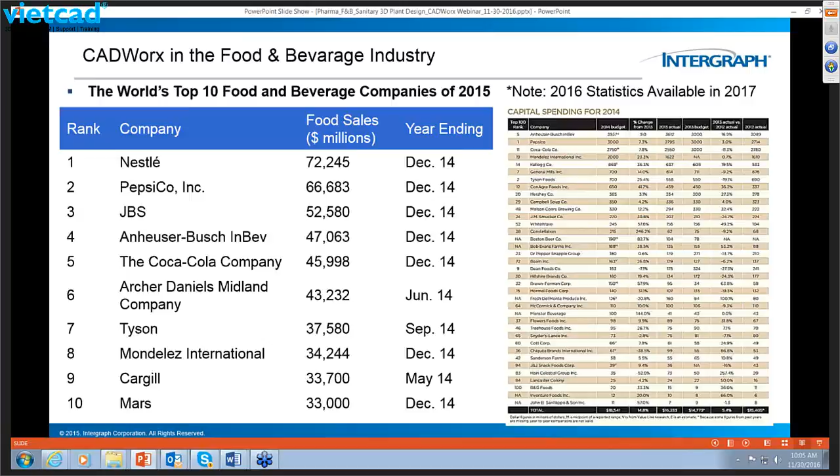And then the chart on the right is really reflecting capital spending. So they are making large revenues and investing in themselves as well, but any of the companies that service them are looking for performance advantages, and that's really the message today, is that CADWorx is a performance advantage for any of the consumers of our software and using it in these industries to perform plant design.

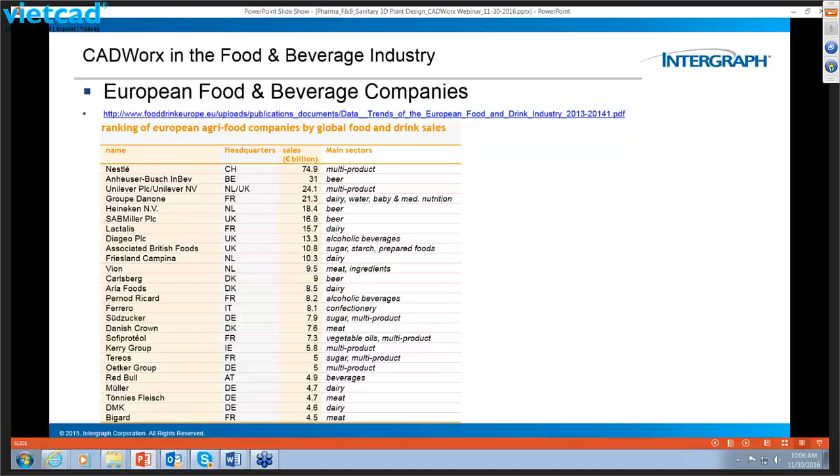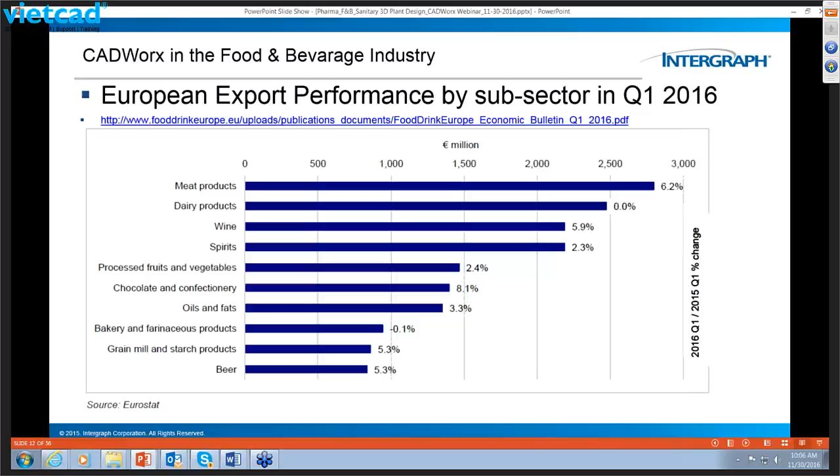Now, with that said, at Intergraph, we understand that our CADWorx plant professional software must meet the demands of our customers in the food and beverage industry. Some of those customers, as an example, is Nestle, Miller Brewing, Kraft Foods, to name just a few.

And when we talk about this, we really are talking about a plant inside of a building, as we show here, the Nestle plant in Bakersfield, California. The challenge is that we have a plant design, but it must be held within a building which is intended to maintain a clean environment.

With that said, that same plant, the Dreyer's Grand ice cream plant, is the world's largest ice cream plant. And in that regard, for the dairy industry, it's quite a success story. One of our clients, the Dennis Group, has been involved with this client for some time. We thank the Dennis Group for their success and performance with our software since the early days of adopting the sanitary specification.

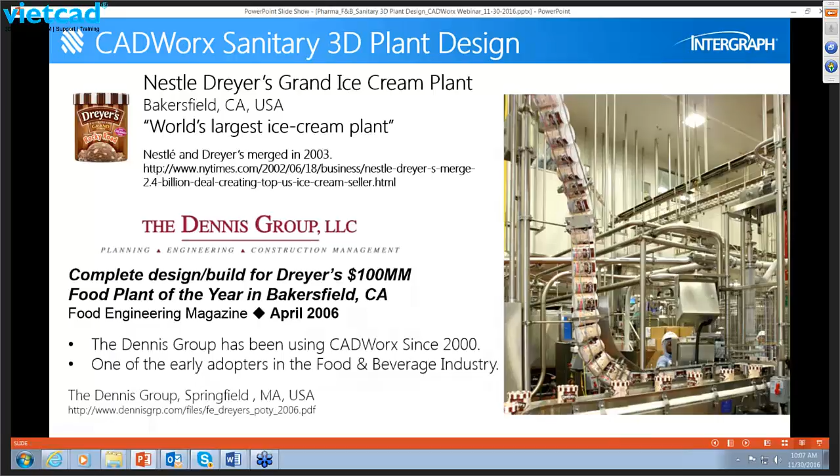Another success is with Briggs of Burton in Staffordshire, UK, where they utilize CADWorx for the food and beverage, pharmaceutical, and health and beauty market. As you can see by this quote, they leverage the database, which results in cost savings from fixed prices with their suppliers because they were able to maximize discounts by ordering in bulk based upon the model. So some really good performance there.

Here's another example in the wine industry in California where CADWorx is utilized to develop their 3D models for wineries, and that application of sanitary piping as well.

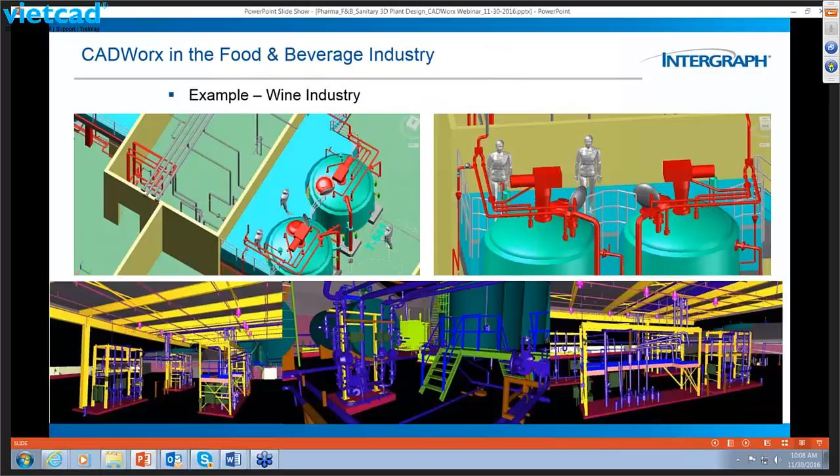Moving on to the pharmaceutical industry as an example, the global pharmaceutical market is worth some $300 billion a year, a figure expected to rise to $400 billion within 3 years. And the 10 largest drug companies control over 1/3 of that market, several with sales over $10 billion a year and profits in the 30% range.

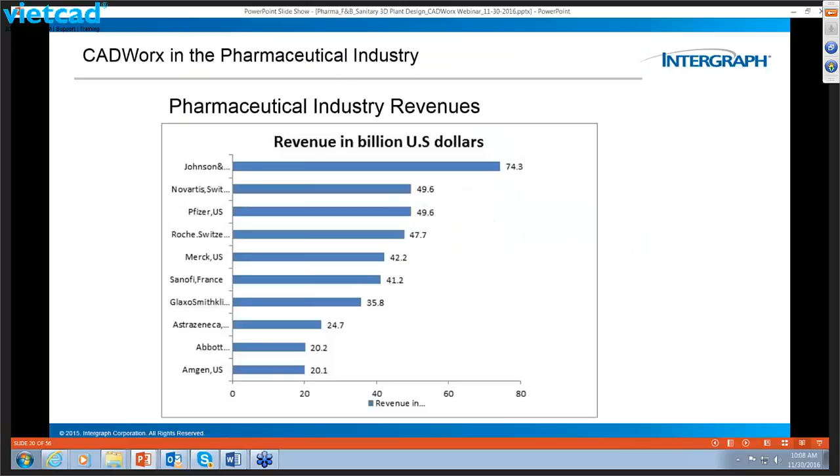But if we look at revenues, in this graphic, we see that it's a very lucrative industry, obviously. Some additional statistics: an estimated 3 billion euros in capital expenditures currently going into the ground in construction. We have companies currently upgrading and expanding their facilities, such as Pfizer or Bristol Myers Squibb. Projected range for these projects are anywhere from 75 to 700 million euros, and will take between 3 to 5 years.

So it's a very lucrative, active industry, and I think we all would agree that we have to eat, we need medicine, we have to drink water. So these alternative industries are growing and will continue to grow over time. They're very prominent and lucrative industries to be involved with.

Some additional statistics, and I bring your attention to the top line, revenue worldwide pharmaceutical market, but then the bottom line projects that spending on medicines by the year 2020 will increase by some 50%. So those statistics mean that there will always be work in these industries.

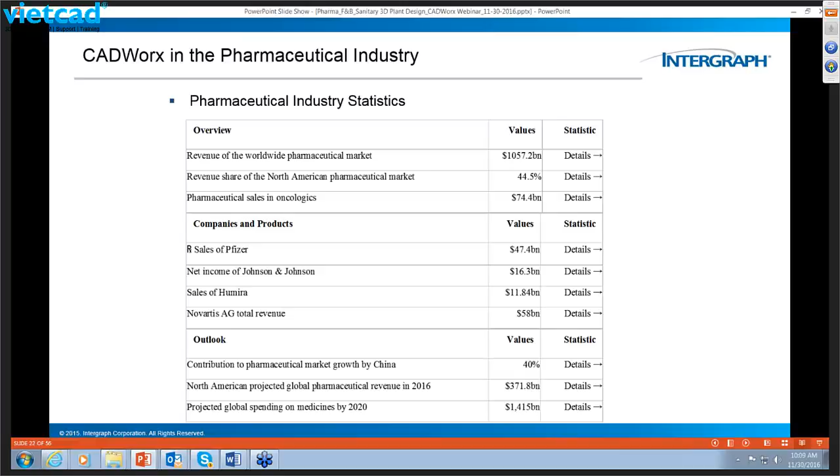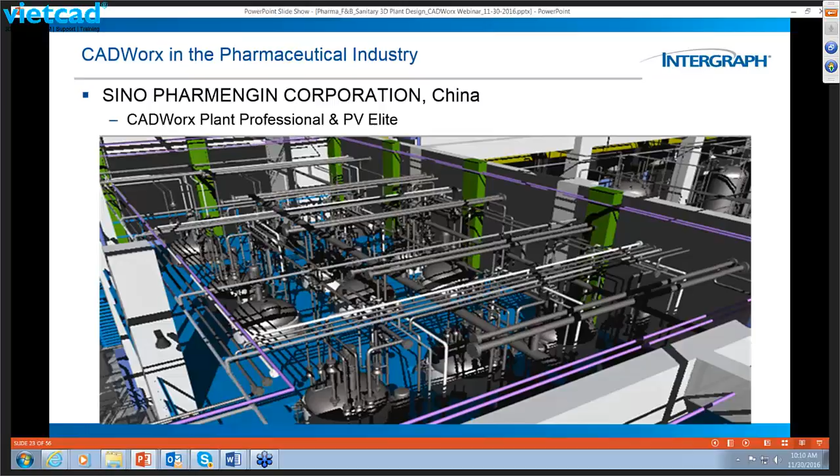Here's an example of CADWorx at work in a pharmaceutical project in China. As you can see, CADWorx was used for the piping vessels. PV Elite was also involved there as well, and we see some examples of that. So there are some examples of some really great projects. But here again, notice that everything is contained within some kind of building structure.

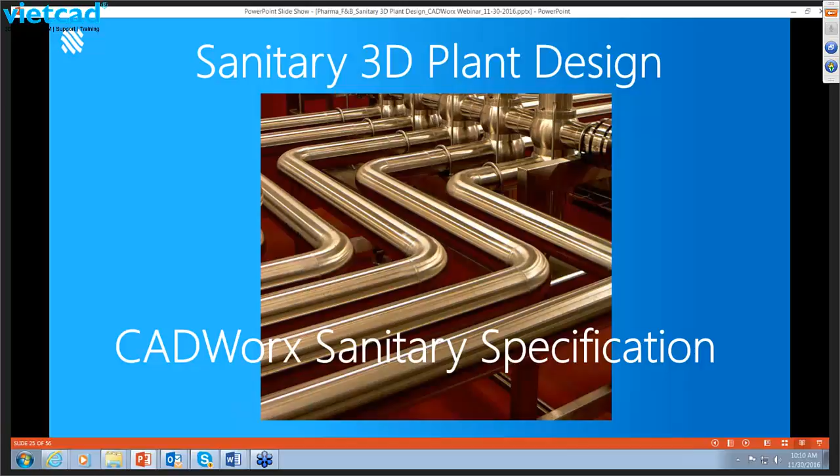Moving on to actually talk about the sanitary plant specification. As we all know, it involves stainless steel tubing and some very unique multi-port valves, as we see here in this image. We understand that the pharmaceutical and food and beverage industries have unique stainless steel piping systems, valves, and vessel requirements, and we deliver software tools to address your industry needs. As we see here, a very unique valve matrix, lots of clamped fittings, and unique vessel representations.

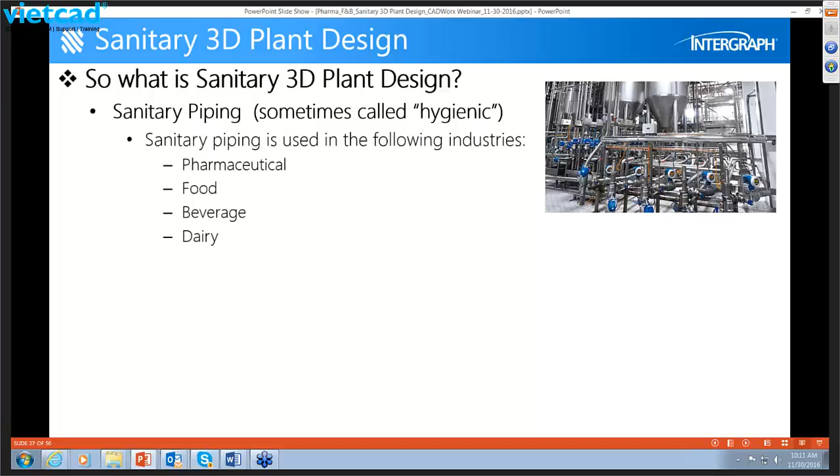As we know, sanitary piping is really utilized in the pharmaceutical, food, beverage, and dairy industries. And as you can see there on the right, a very unique stainless steel environment, very clean environment. Why is that? Well, we have clamped connections which are designed to allow piping systems to be installed easily and then disconnected quickly to modify piping systems between production runs. As you see there, we have the ferrule, the clamp, the gasket, and the other ferrule. These ferrule connections and clamp connections are unique to this industry, and so our specification has to support that requirement.

Obviously, there's another requirement for slope piping to eliminate bacteria entrapment areas. So all systems have to drain. And then we need to support these unique multi-port valves, as you see there in the lower right.

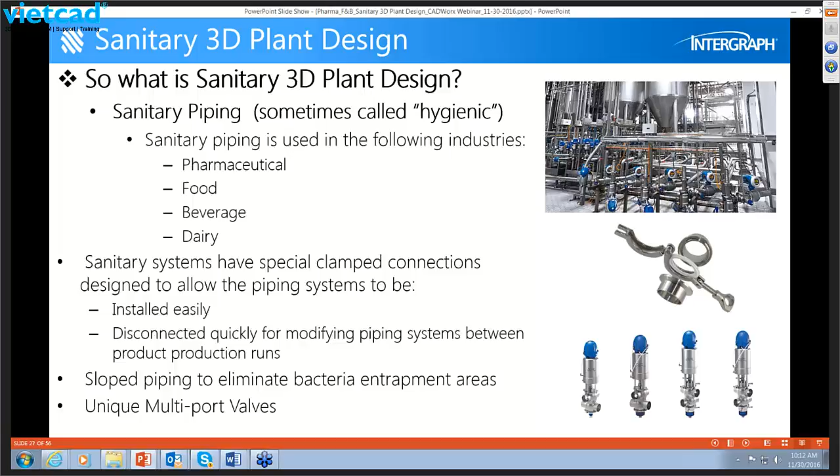Going down the checklist, all process piping and clean in place, or CIP, piping in plants consist of sanitary stainless steel fittings, valves, and pumps, as you see there on the right. Sanitary fittings are polished stainless steel tubing fittings that have to meet certain industry regulations, such as in the case of the U.S., the USDA and FDA regulations that must be met. Obviously, there can be no cracks or crevices or surfaces, including the gaskets, that could hold bacteria. We're supporting the 304 and 316L stainless steel, which is required for cleanliness or hygienic reasons. And we support the butt weld and clamp type fittings as well.

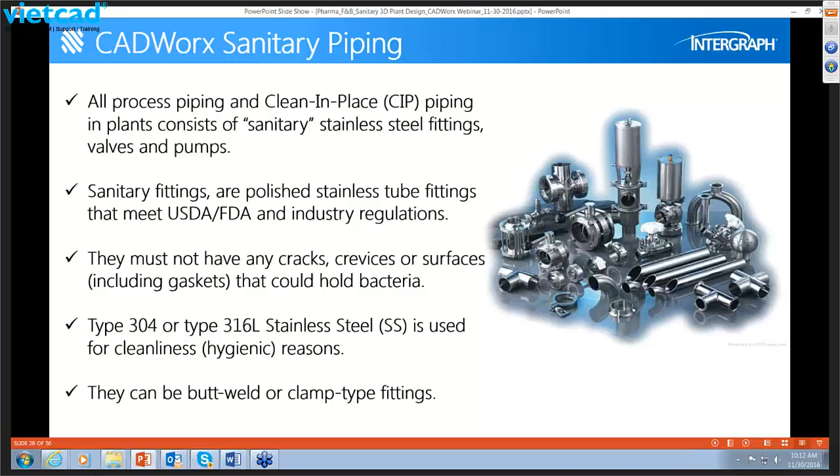A little history. In this case, Jim Lin was one of the original authors that worked with us to develop a sanitary spec, so I pay some credit to Jim for helping us. And that history involved Jim looking for something in the sanitary industry back in the late 1990s.

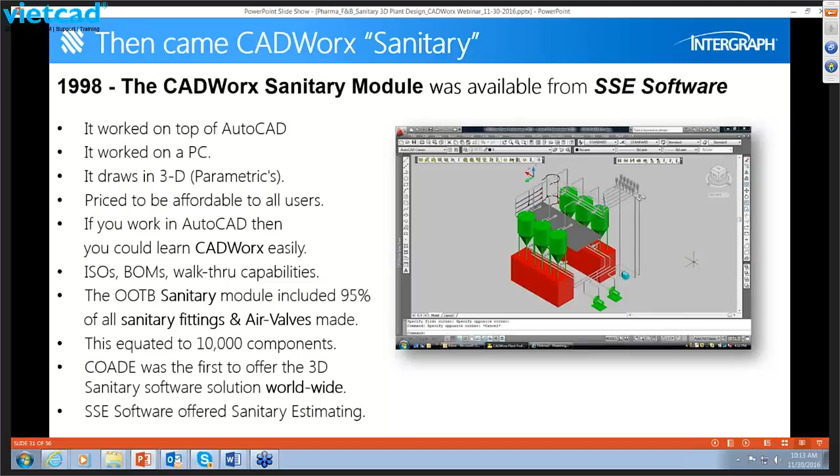Vernon Walker, who knew him, played a key role in having Jim team up with what we were then called COADE to help develop the sanitary spec. By 1998, that spec had been developed and was working in an AutoCAD environment, supporting the migration from 2D drafting, 2D design, to 3D modeling. So in this case, Intergraph, CADWorx and Analysis Solutions had led the way some 18 years ago to move forward with the sanitary specification in support of the pharmaceutical and food and beverage industry.

With that said, I teamed up with Jim again in 2014 to move that legacy sanitary spec forward, update it, and make it work within our current software capabilities. And that's really what we're here to talk about today. That was published as a content pack for our existing customers and for those of you who may be looking at CADWorx and considering it for your applications of sanitary plant design. We had a content pack published in February of this year.

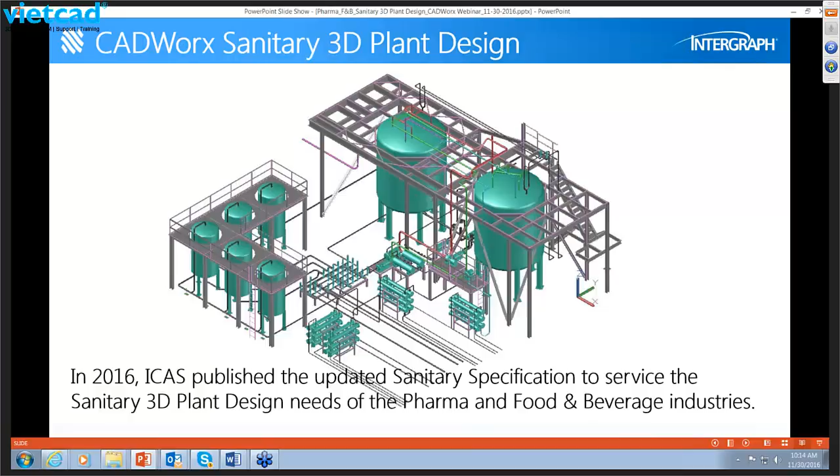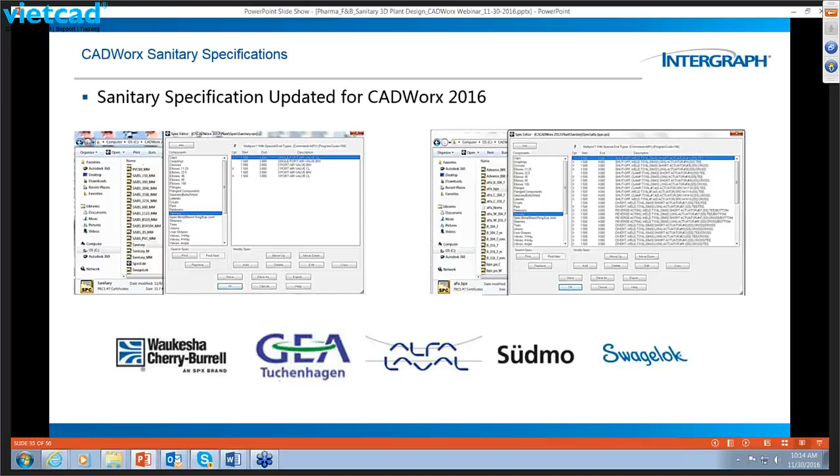That sanitary spec involved migrating a lot of historic data forward into our current software and evaluating various manufacturers of multi-port valves such as Waukesha, Tuchenhagen, Alfa Laval, Südmo, Swagelok, and currently I am in discussions with ITT. That specification, when we look at it in the spec editor, contains the necessary long description information to provide you accurate deliverables and bill of materials for purchase purposes or constructability.

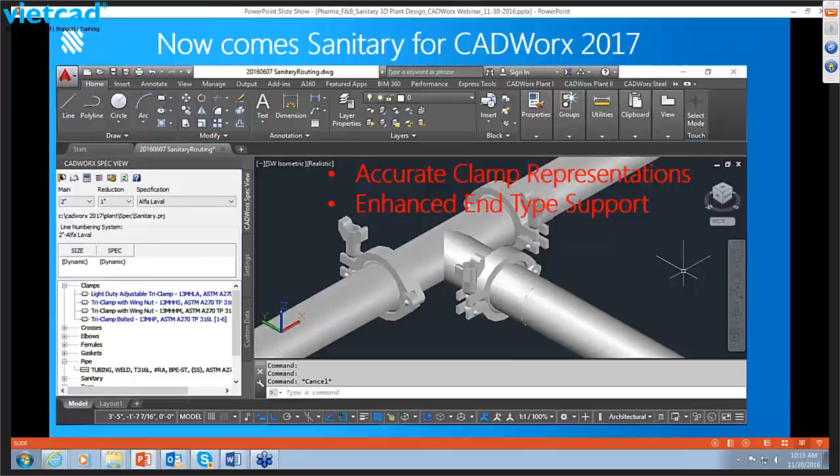So let's move to the CADWorx 2017 version of our software, where we are very excited about showing these very accurate tri-clamp representations, as you see here on the screen. That involved enhancing our end type support for clamped conditions or grooved pipe conditions. We focused very strongly on the types of clamped conditions that may be required in your plant design, and the routing enhancements and gasket associations or bolt associations have been addressed.

And then we have a piping rule that allows you to turn on and off a very accurate 3D representation of the clamped condition, which allows you to control when and if you see this representation, and this will be shown to assist you in clash detection value as well.

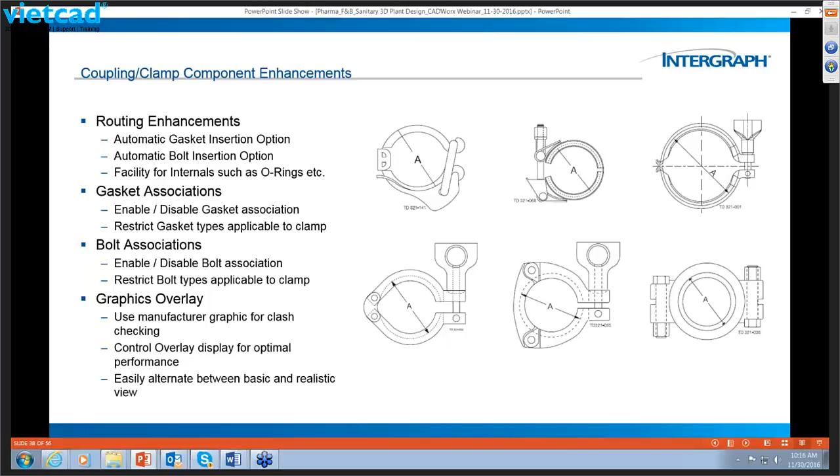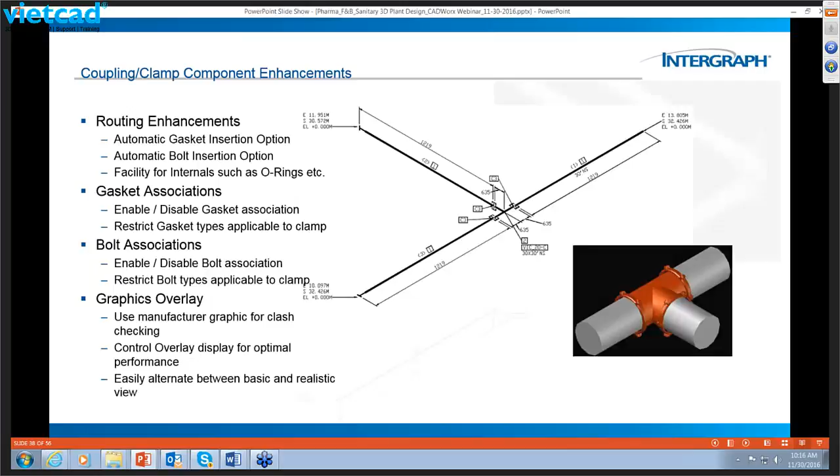The same thing is true with some other clamped conditions. In the Victaulic representation, we have a very accurate representation for grooved piping as well, and here you see an example of the ISO representation for that condition, and another representation of the tri-clover or clamped conditions, whatever it may be. The Isogen SKEY represents the appropriate coupling, and if it's a ferrule connection, then the ferrule is also showing up as well.

So we've moved forward with an improved, enhanced capability clean across the board for these clamped and coupled conditions. And as you can see, the multi-port valves also support all of that representation, which then allows you to, like any other valve, pick on the valve, the plus sign, and begin to auto-route BPE tubing right from the valves.

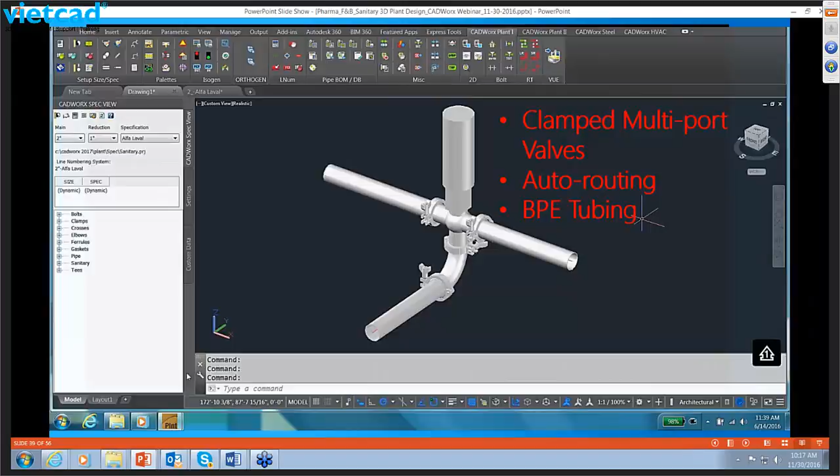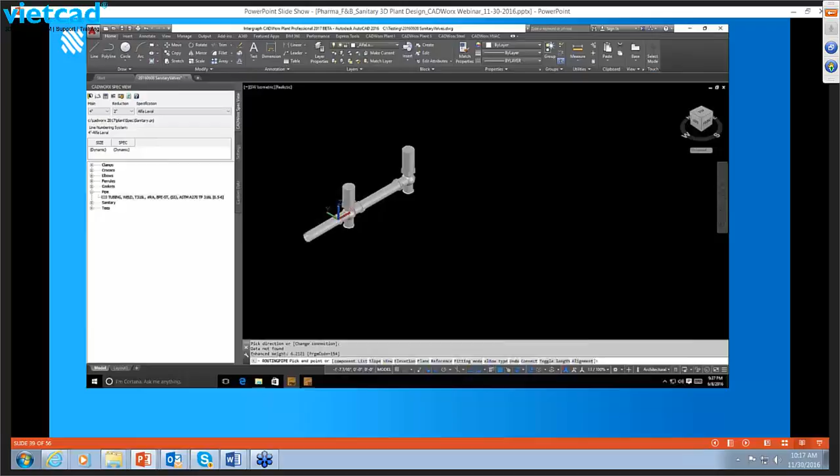Now what I'd like to do is actually show a very brief video, just so you can see this in action, but then we'll go to a live demo in the software that follows. Just to give you a very quick look at it, as to how we are auto-routing just like any other CADWorx components. In this case, it is the Sanitary specification, and all of the components are available in the right-click mode as you're accustomed to with the CADWorx products that we sell to the oil and gas industry. We're very excited to share with you today that all of this is working fine for the Sanitary spec.

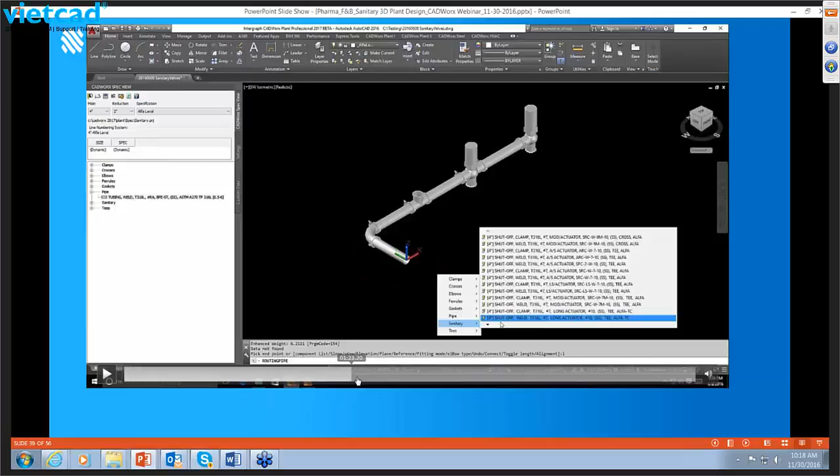I'll just progress along. As you can see, we're easily auto-routing in a very productive, intuitive workflow with the spec as it is. I'll move forward in the video to show you again that all of this information is available through the component or CADWorx component edit dialog.

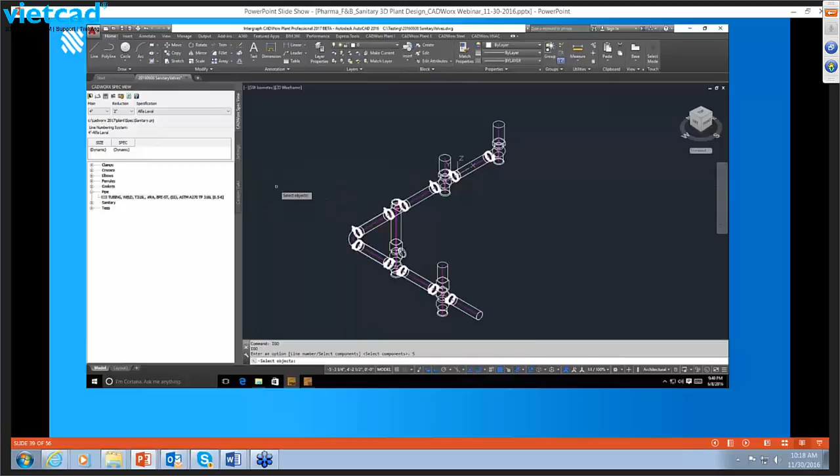But now let's go to the ISO so you can see that. We'll see this again live here in just a few minutes when we go to a demo. So we'll generate some ISOs and take a look at that result.

Some of these bill of materials spill onto the second page, but now we look at the representation of the multi-port valves, the ferrules, the clamps - all the information that is clearly represented in the ISO now. And of course, the associated bill of material information is called out quite clearly, as you can see, the tri-clamp with the wing nut and the ferrule, etc.

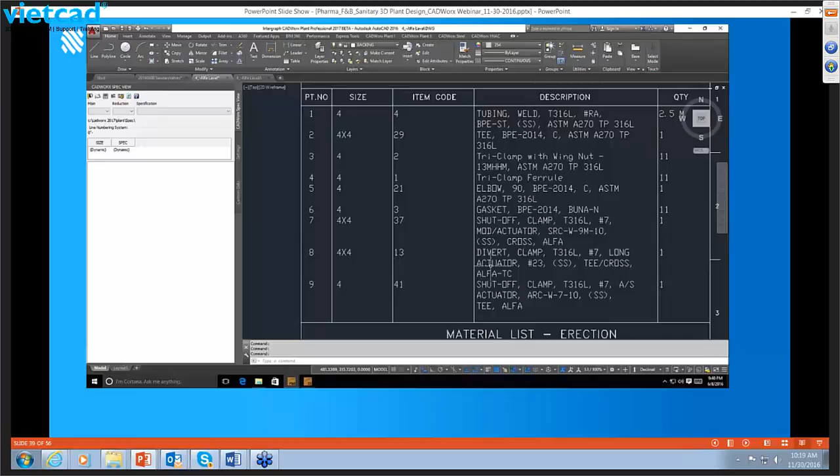All right, so with that said, I'll move on to the next screen, and obviously the clamped and ferrule condition is well represented as we now show here again.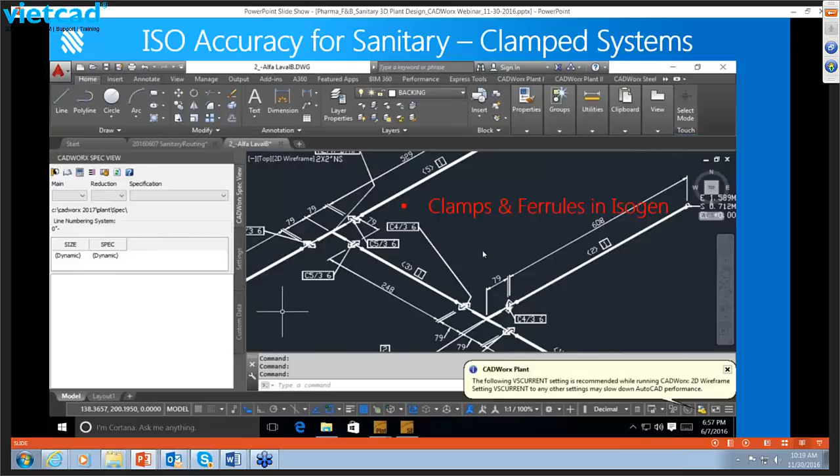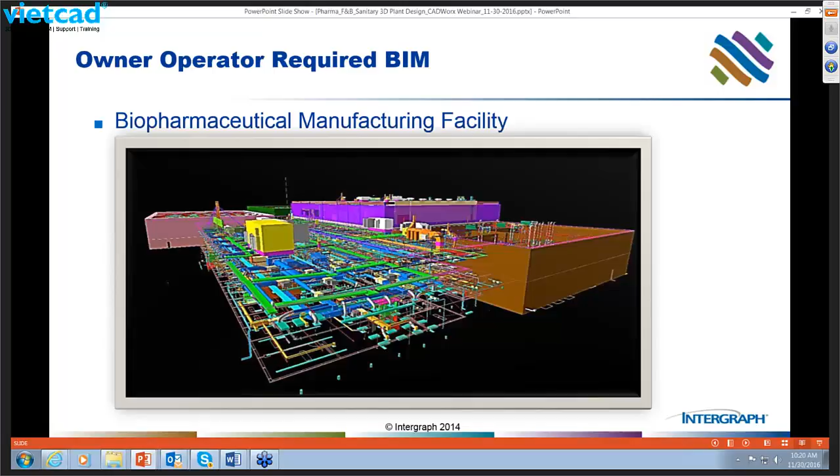Here's another example of what I was talking about earlier: this is a plant inside of a building, a representation of a pharmaceutical plant where the owner required BIM, or Building Information Modeling. This is a good segue to talk about our recent updates to the CADWorx Design Review 2017 software, where we have a new export capability to meet BIM standards and deliverable requirements in those projects.

That being that we can create an IFC file—I'll explain that in the next slide. This enables a new level of deliverables, enabling you to comply with project requirements and satisfy owner requirements for BIM implementation. This improves your collaboration with other stakeholders by sharing the data. It passes data-rich content, which in turn serves downstream needs of facilities, operations, and maintenance.

What we're talking about is the fact that most of these projects have some kind of architectural software creating the 3D building—that might be Revit, Graphisoft ArchiCAD, or some other product. But the whole requirement for interoperability is paramount in meeting BIM standards, and those BIM data exchange standards require a specific data exchange format, that being an IFC file.

That standard for Industry Foundation Classes is something we're very excited to share with you, new in CADWorx Design Review, enabling you to meet those BIM deliverables of IFC files and exchange your data with other stakeholders such as Revit users. So what does that interoperability workflow look like?

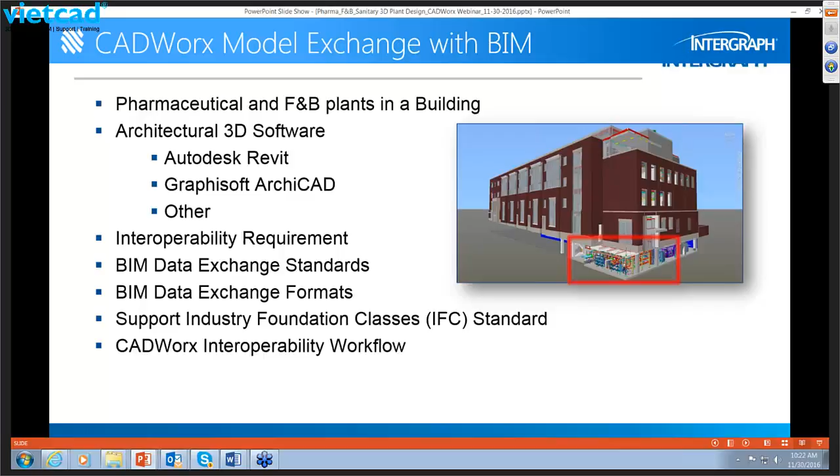It's very straightforward: take your CADWorx 3D piping model, open it up in CADWorx Design Review, and export the necessary IFC file. That in turn can be read by Revit. An import of the IFC file brings the CADWorx 3D piping model directly into a Revit building. In turn, the intelligence has been passed through—the data-rich content of our CADWorx model is now present and visible. So you've been able to share your 3D CADWorx model inside of a Revit building model.

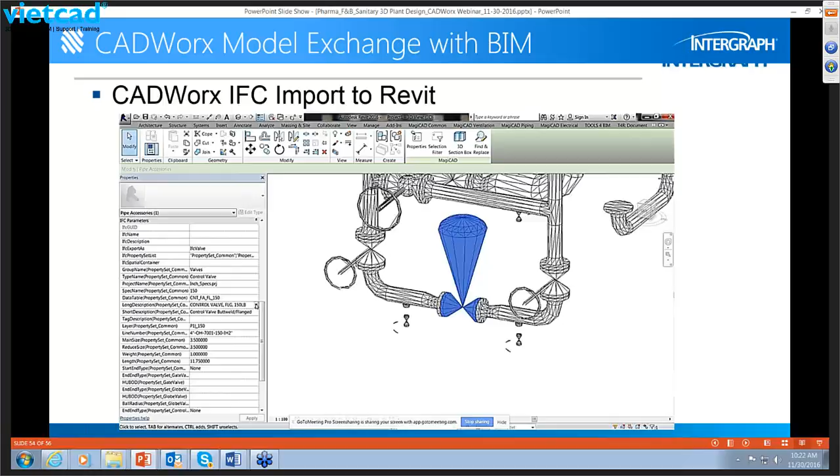And with that said, I think it's time for us to go to a poll question, isn't it, Alex?

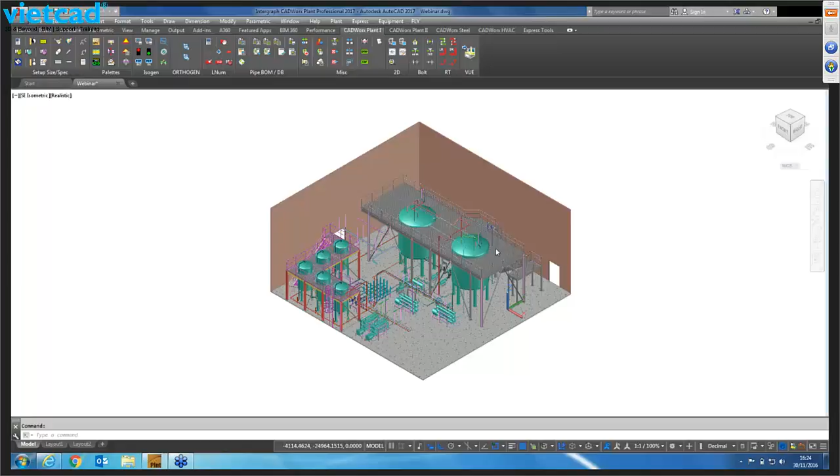Okay, on the screen we have an example of a CADWorx model of a part of a pharmaceutical plant. If I zoom in slightly, let me see a little better. I'm just going to unload a little bit of this model here so we can see what I'm about to demonstrate.

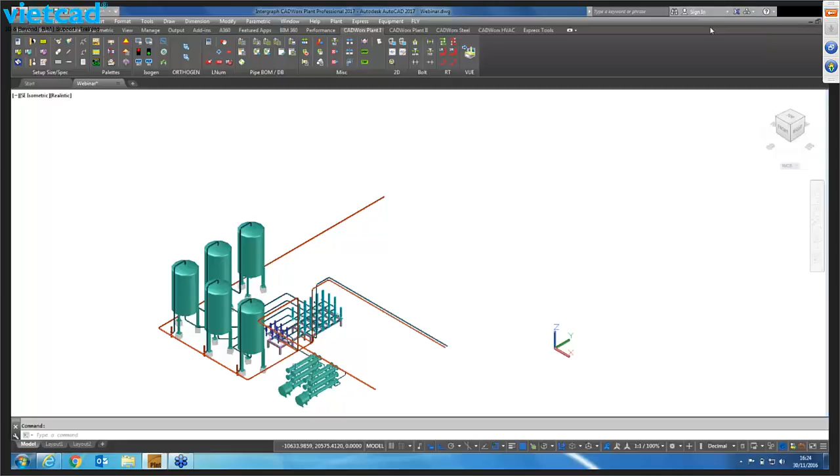Let's just jump round. So if I open up the specification editor, we can see the Sanitary specification that Michael referred to earlier on, and so this is our standard BPM or BPE for you guys. Also within here we have various valve specifications as well.

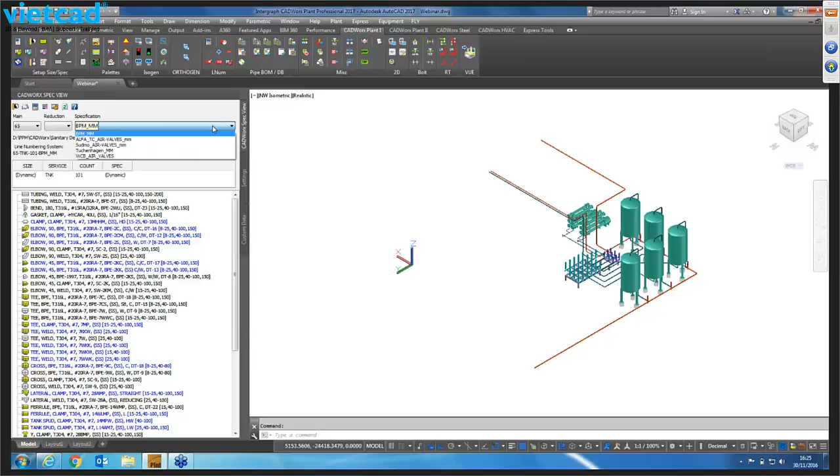So I'm going to zoom in down here and let's start routing with this tubing and various components. Let's pull away from this ferrule here, using the exact same line number—we see we have the two tubing options that we have within our spec. So I'm going to come out 2 meters, and then I'm going to use the auto routing to connect to the nozzle on the bottom of this CIP tank.

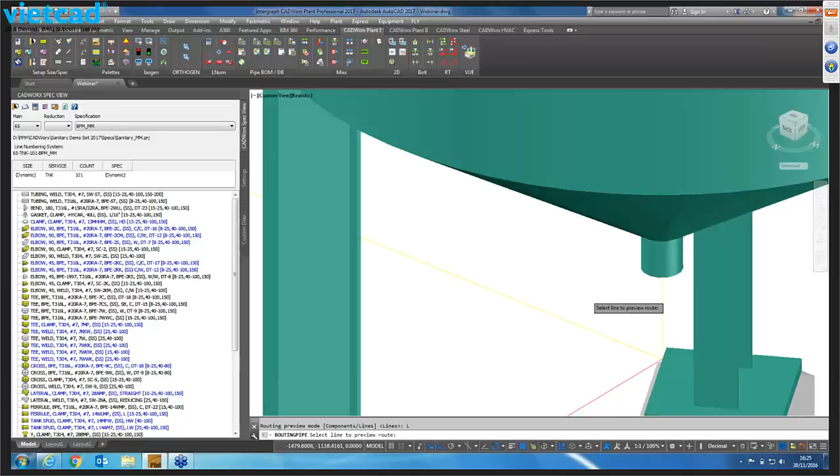So we get our two routing options. I'm going to use the yellow route, and we have the option to add a fastener component to the nozzle. So I'm going to select a clamp, and we should see the clamp there, and also then a ferrule.

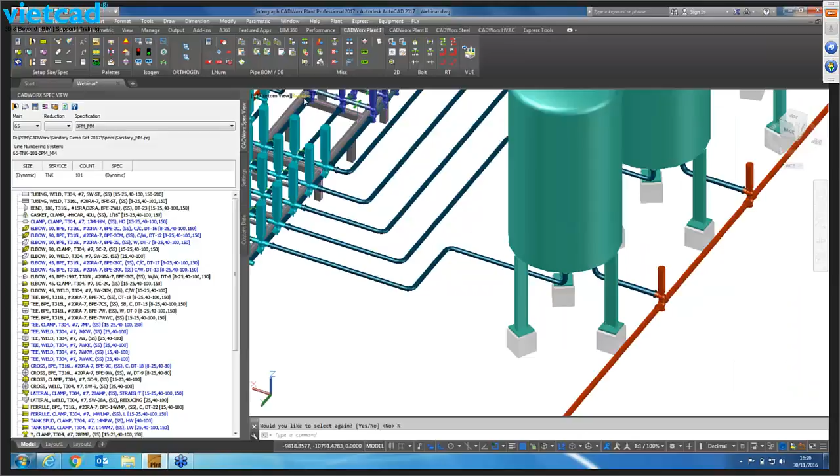I'm going to choose that line, and now I'm just going to jump to 2D wireframe, and let's have a quick look at that nozzle. So we can see that we have placed the gasket, ferrule and clamp all associated with that connection. Same at this end here as well.

So if I just hover over each of the components, we can see the long description that Michael referred to earlier on, which contains the type of the steel material. Also, we'll notice that it contains the polish as well, which is quite important in this industry and this specification. And that happens to be on all the components.

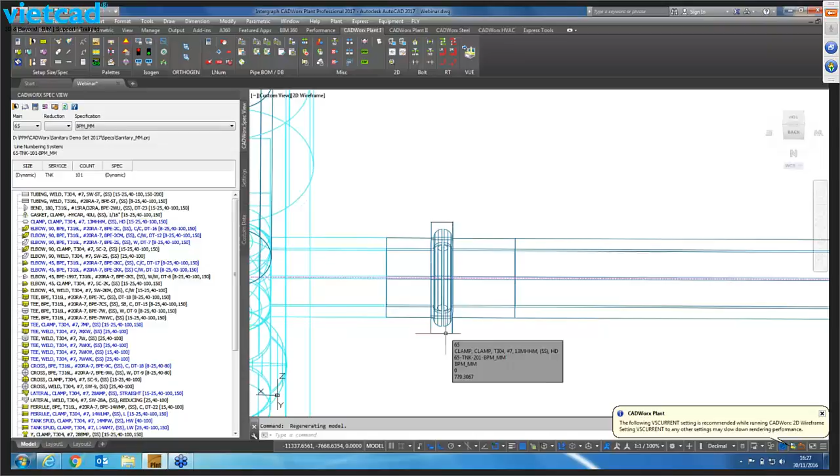So we have the same for the clamp, and then let's be a little bit tricky here, but see if I can grab the gasket. Yep, and the gasket too.

So let's go back to our realistic mode. And then let's come around and look at this CIP line that runs behind these tanks at the back here. Now we can see we already have some multi-port valves already placed on the line, so let's add another. So let's switch, and I'll use the Alfa valve specs.

And as we can see, we have quite an extensive specification here, lots of different types of valves. I'm going to grab this one from our spec.

And as we can see, we've grabbed our valve, and just before I place it, as we're all aware that we use piping rules within CADWorx to help automate and make placing components and routing a lot easier and more efficient, and that's exactly what I'm going to do here. I'm going to fully utilize them.

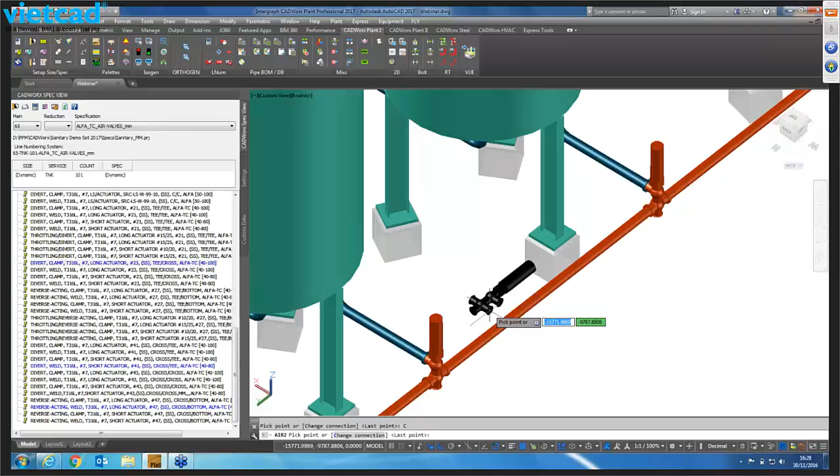So before I insert it, we can see that we can cycle through all the various connection points on each of the ports of this valve. So that's the one I want, and let's place it on this line.

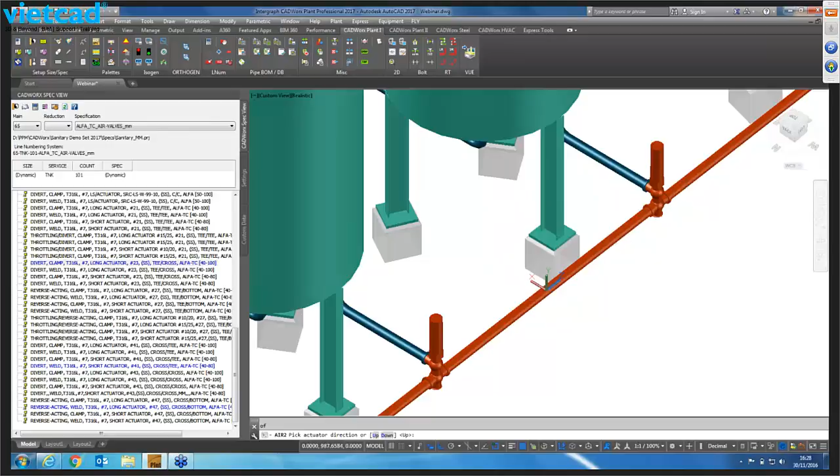Like any other inline item, I can move it along the line. I can also change the justification. So there we have it, it's to the middle of the valve, and we're going to place it in the middle of this pipe. And then I get the option of which direction do I want the top port to face, and we'll place it there.

So I'm going to keep the specification because the line we're currently on is the BPM, but the valve is on a slightly different specification, so I'll keep that. And here we have the rules coming into play.

So it recognizes that it's a ferrule connected clamp pipe. So we'll select ferrule, and I see I made a mistake. Let's place it on.

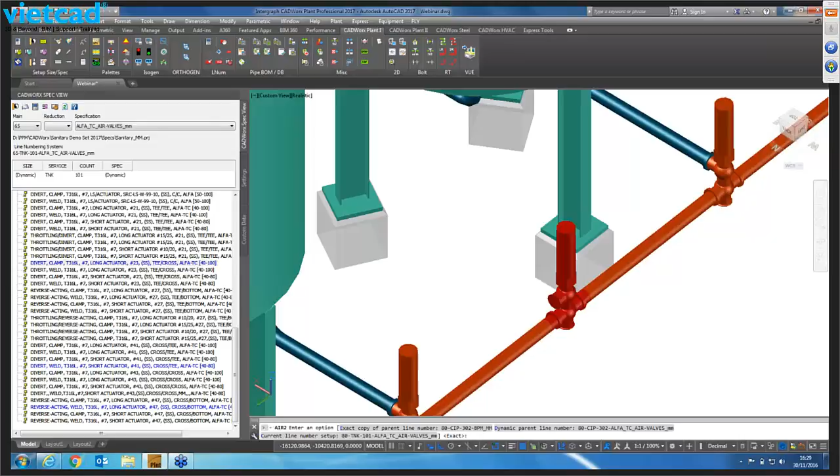Nice, okay, yep. I thought I'd left it the wrong size, but again I've got my rules set up just so that it doesn't matter, it's changed the size. So I'm just going to close that down for now.

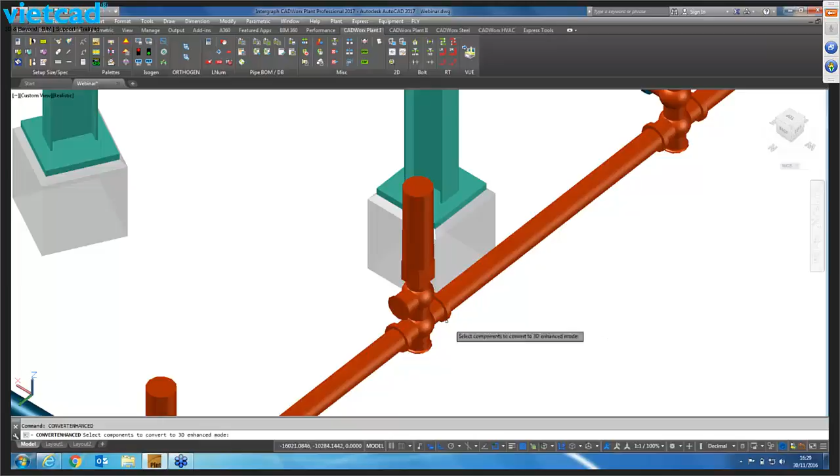And we notice we have just plain clamps, and now before, earlier in Michael's pictures, we saw we have a graphics overlay for these clamps. So if I run a command, we can see those very same clamps here.

So they are all set within your specification. So if I open up the spec editor, we can see our spec available here, and look at the couplings, which is the clamp here. Look at the data table in the catalog, and we can see the directory where the DWGs are saved, and also the DWG itself. So each one is assigned to a particular size clamp.

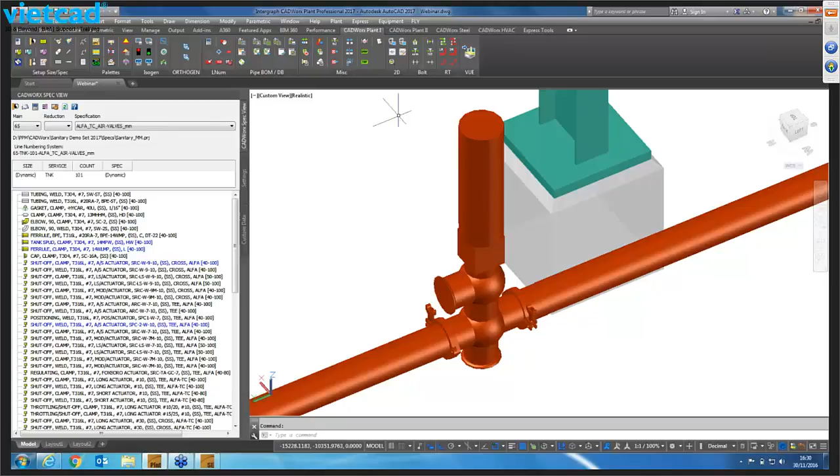So I'm going to switch to a top view to show this a little better. I'm just going to change those back to the visual style that we saw before.

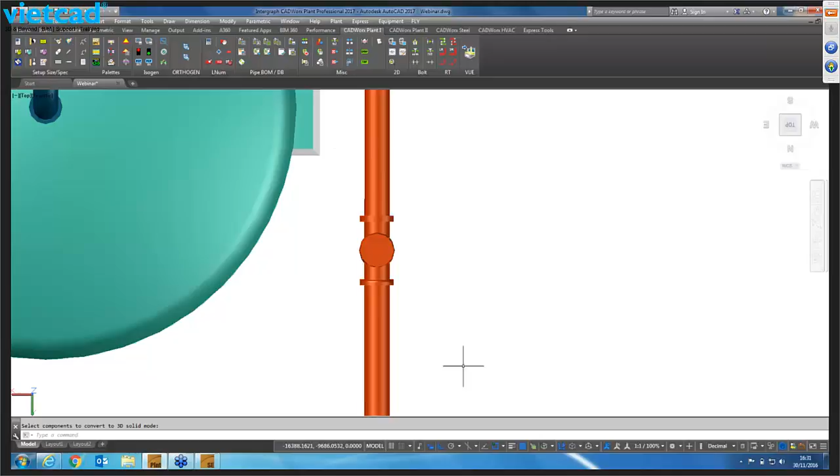I'm going to copy this line and just move it over slightly. That should be enough. So we can see at the moment nothing's clashing in this view.

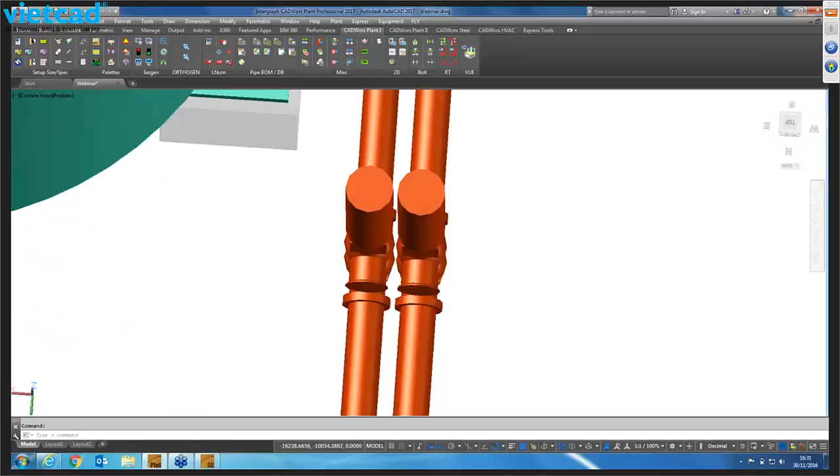There's a bit of a gap between the clamps and the valves as well. In fact, the valves are pointed the wrong way, so once they're in place they can always be moved. So I'm facing that way.

And now let's turn our clash detection on, just to show that there's definitely no clashes there. Nothing's coming up in a list, everything's happy.

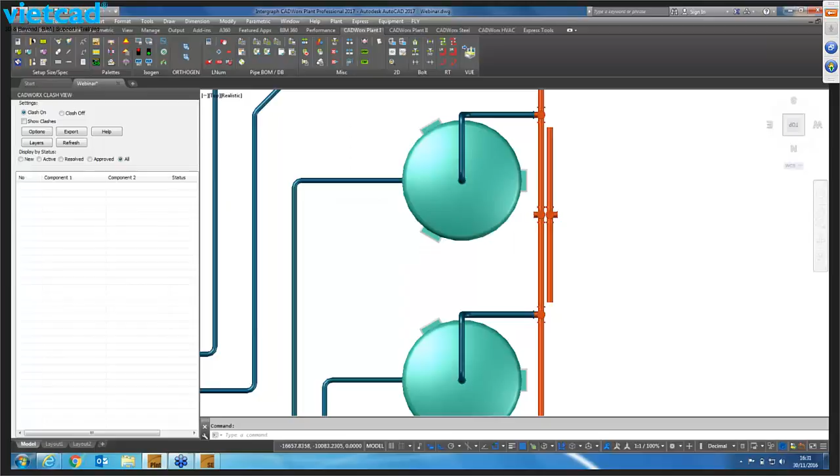But we know that the clamps are much bigger than what they're currently being represented, so let's show those clamps again. And we can see there's definitely going to be a clash there between those two. So if I refresh my palette, we should see this clash show up in the list here, which it has.

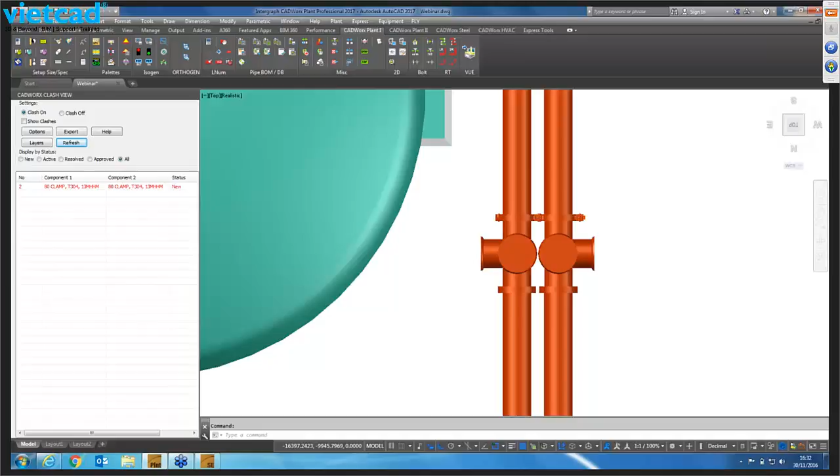So, as Michael alluded to just a few moments ago, this overlay really helps with clash detection and increased accuracy. So let's move this aside.

Clash is now gone, issue resolved. We also saw in that video we can pull away from the clamps, from the valve.

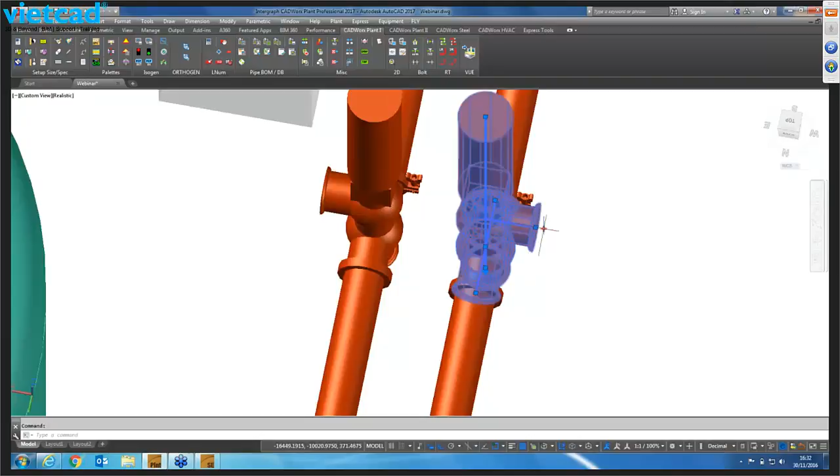Once we finish routing, CADWorx picks up that it's a clamped connection, so we add the relevant ferrule, and it's added the clamp and the gasket as well.

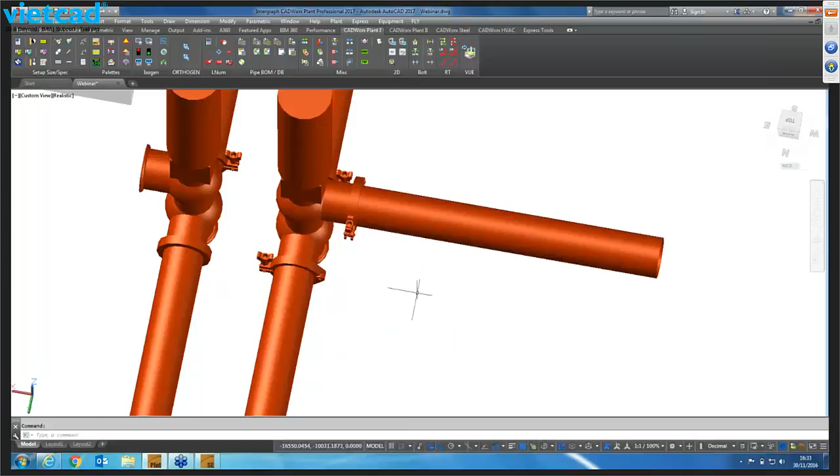So let's see all the clamps on here. I'm just going to rotate this one, so then it's in a position that's much easier to place and service, in case this valve needs to be taken apart or replaced.

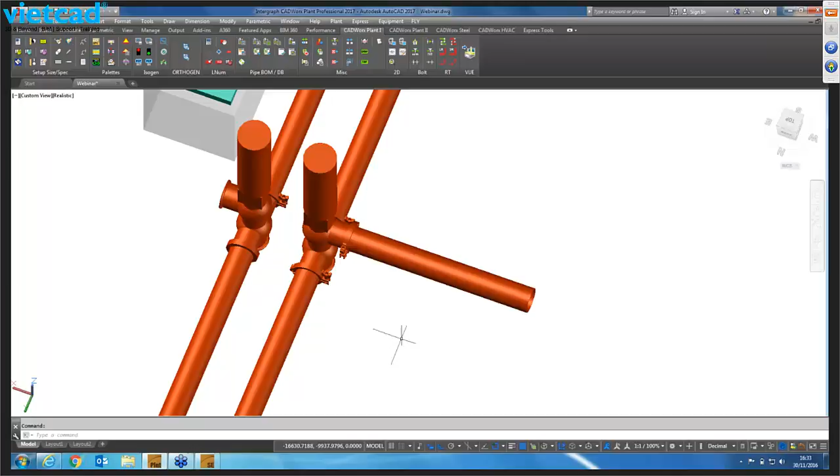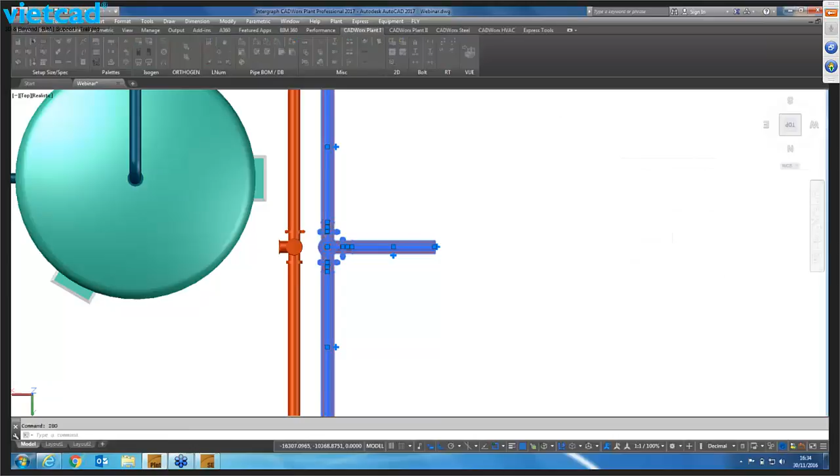Next thing to see is how this is represented on an ISO. So let's run Isogen on that line we just created. Let's see if we can see if it'll run this time. Let's try running this bit of light pipe instead. Yes, there we go.

As we can see, we have a multi-port valve in the middle, we have our clamped connections there and there. We even see where there's a change in spec, the pipe's BPM, but the valve that we placed is from our Alfa air valve spec.

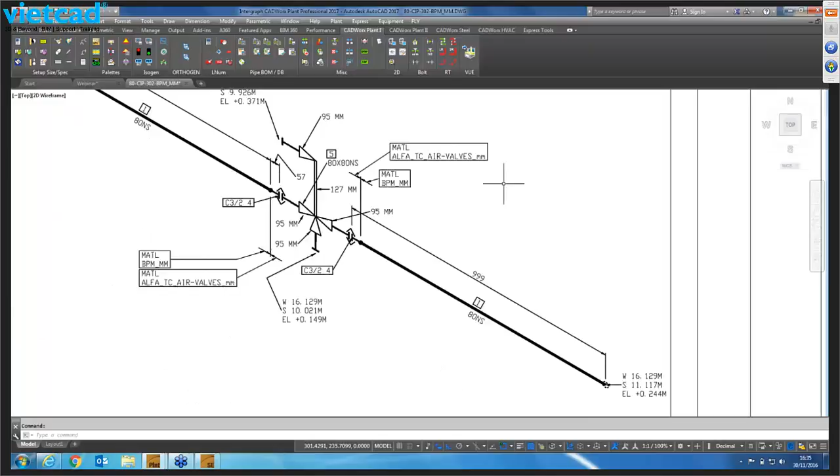Also at the top here, we have our accurate material list, including our long descriptions and material type and polish. So I'll come back to our model. Let's quickly export a bill of materials to show that as well.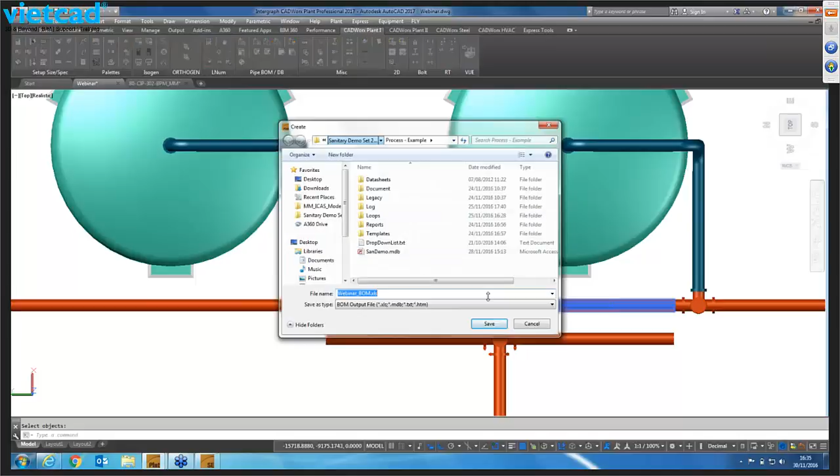Here we can see exactly the same list. So we have our valve, we have our 2 ferrules, 2 clamps, 2 gaskets, and also roughly 1.9 meters of tubing as well.

The next thing that we want to show you is routing sloped pipe. To do that, I'm just going to bring in some more equipment and some more piping. Let's just attach that drawing and insert some more piping.

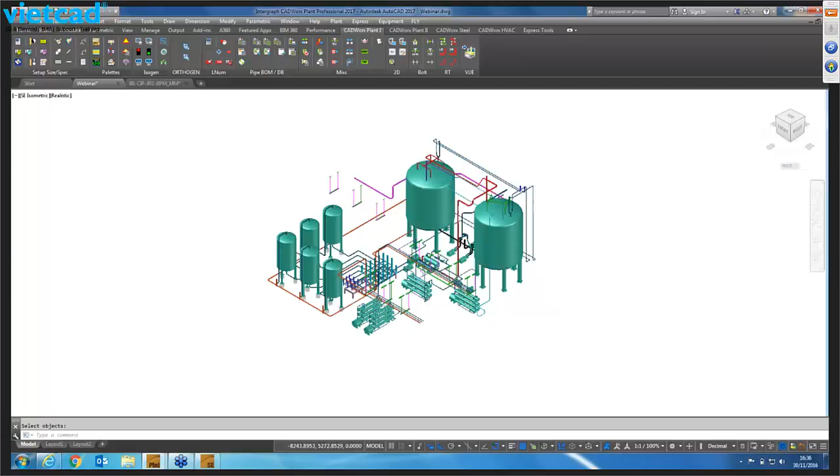So we see we have some piping already started at the top here for this vessel. I'm going to route from there down and finish on this pump here. But we need this piping or this tubing to be sloped.

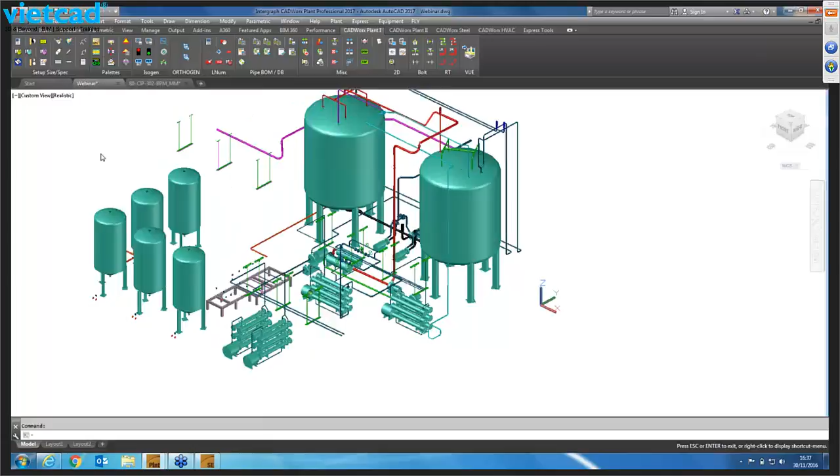So all I'm going to do is use our line view palette just to isolate that line and the equipment. Let's use a plus grip and pull away.

Select the tubing that we want. I'm going to come up 450 mil and then select the elbow that I want to use from the specification. Now this is where I want to start my slope piping.

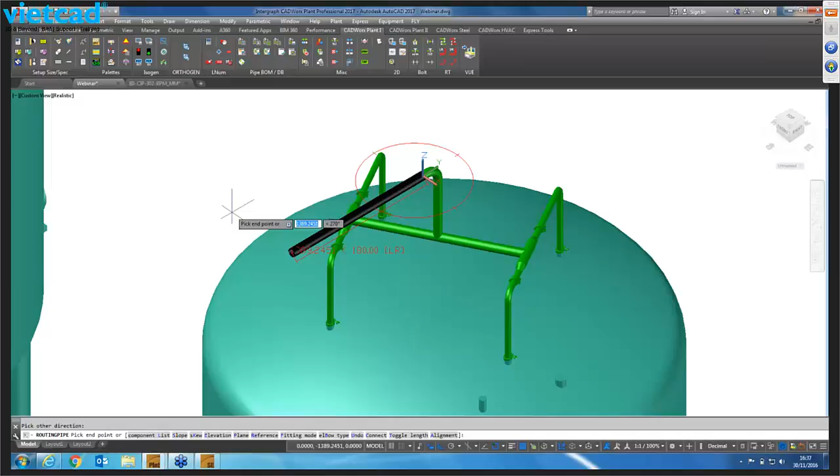So I'm going to use S, or I could pick from the bottom on the command line to start the slope piping. It wants to raise by per meter, and I want to run 10 mil per meter.

So first part needs to be 400 mil long, then 7 meters, 1.3 meters, and then 6.5 meters down.

Let's just quickly switch views, and we can see that we are sloping in both directions. So let's finish this off.

That's going to be the end of my slope piping, so I'm just going to press enter again to come out of the slope command. And again, I'm going to pick an elbow from my list.

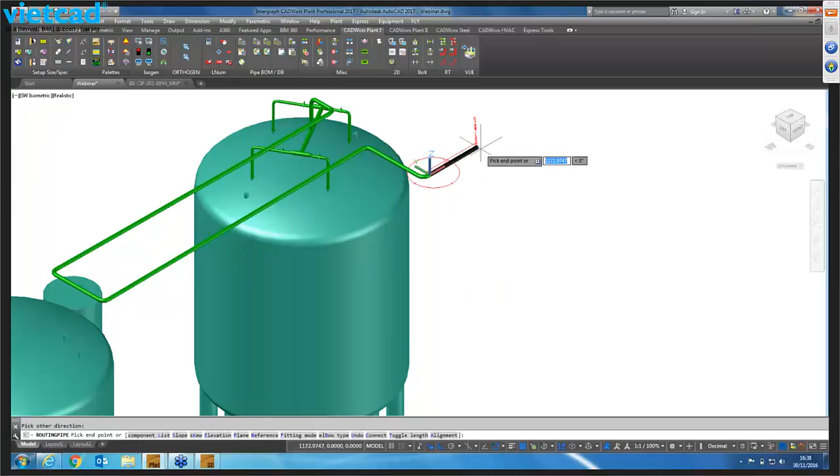Then I'm going to use the auto routing capability of CADWorx to finish off onto the pump, just as we did before. So I'm going to choose the red line.

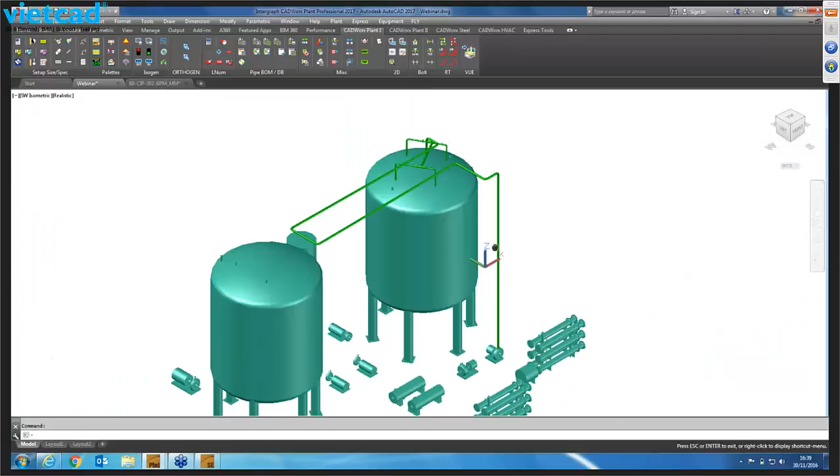So we'll produce an isometric of this, and just before I do, it's quite a long line, so I'm just going to add a stop sign in of where I'd like to break the line, and then we're going to run an isometric.

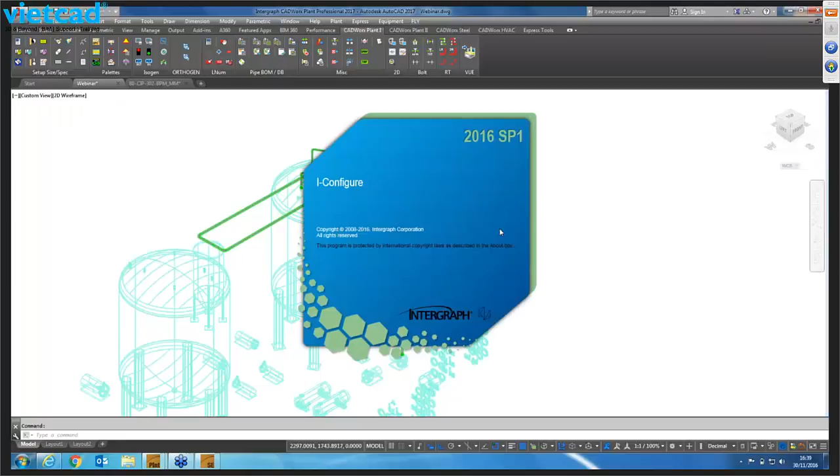Before I run the style, I'm going to quickly jump into I-Configure and make one change to my style. So you can see we have under dimensions, skews and falls.

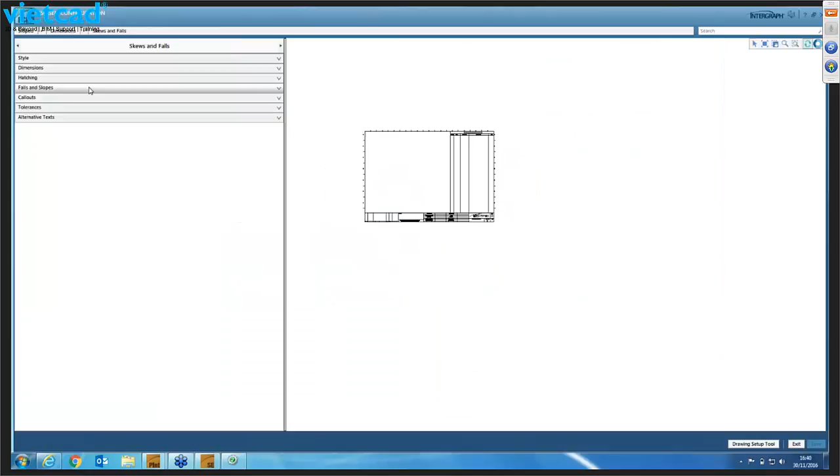Let's maximize our window. You can see we have quite a wide range of ways of displaying the falls on our isometrics. So I'm going to choose the ratio, save exit, let's come out of here and run Isogen out.

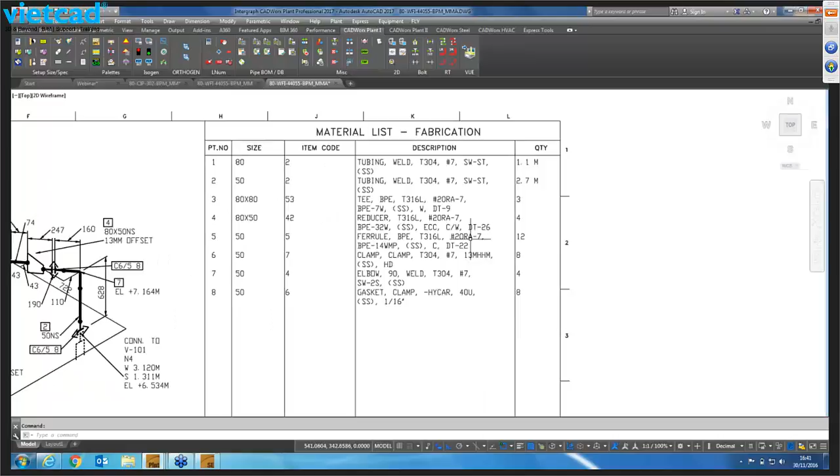Produce two files. As we see from before, we have our clamp connections, also clamp connections on our nozzle, and you see it's calling out the nozzle and also the vessel it's attached to. Again, the same accurate material list, and then let's look at the other file it's produced.

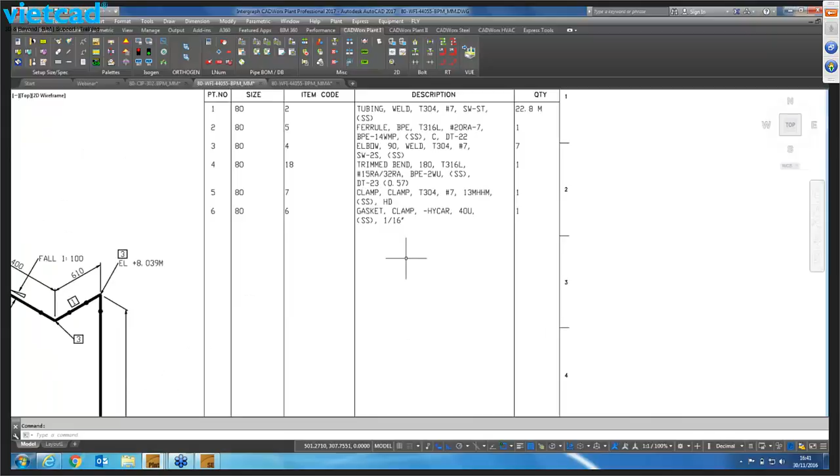Here we can see our falls are all shown 1 in 100, and we also have the connection onto the discharge nozzle on the pump at the bottom. And again, our same accurate material list. And that is all.

Brilliant. Wonderful job. Good job there, Matt. So I think we've covered some of the highlights here with regards to our limited time.